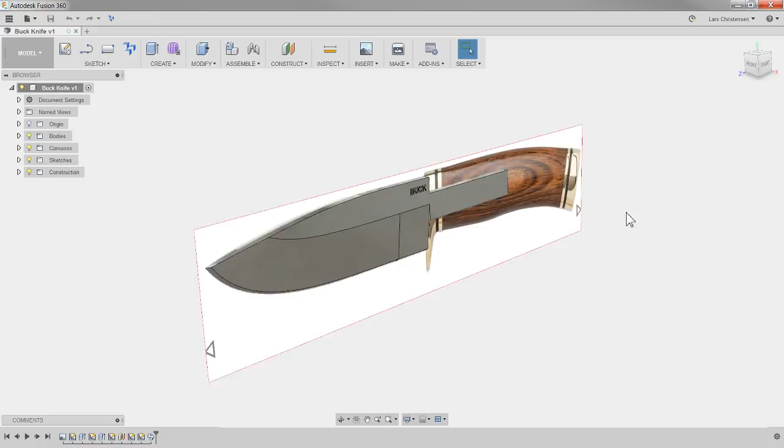My reason for doing that is nothing more than if you want to create this, you have to manufacture it. I talked about my friend John Grimsmo, by the way his website is down in the description after this video. If he was going to make this knife, he would probably break it down into individual components, because at some point he's got to assemble it and be all good with it. From my perspective, I'm really just modeling up this knife, and I don't really care about these different things being different components.

So I decided not to do it yesterday up front, because rule number 1, which is talked about on the forum, means that before we even started doing anything on the screen, we would have right-clicked up here and created a new component. That new component would be the blade, and then we could create another new component. We could rename it by slow left-click, and call this one the handle. Then instead of right-clicking up here to create another component, we could right-click on the handle and say new component.

You'll see that breaks down to a subcomponent, and in here, because this handle is kind of different—there's some different parts within the handle—we could say there was the brass front, if that is what this part is, and then create another component in here and call that brass, too. I hope you get what I'm trying to say here. Rule number 1 on the forum says you should do all this before you even start modeling things up, breaking it down.

That way everything gets organized, and I'm not saying that's wrong. However, on purpose yesterday—let me delete all this—on purpose yesterday I decided not to create any components. There is only that main file up here and one body to create the blade. The reason I did that was I wanted to show you what actually happens when you don't follow what they call rule number 1. It's okay, I don't want to get into a big argument about rule number 1, but in my opinion it's perfectly fine.

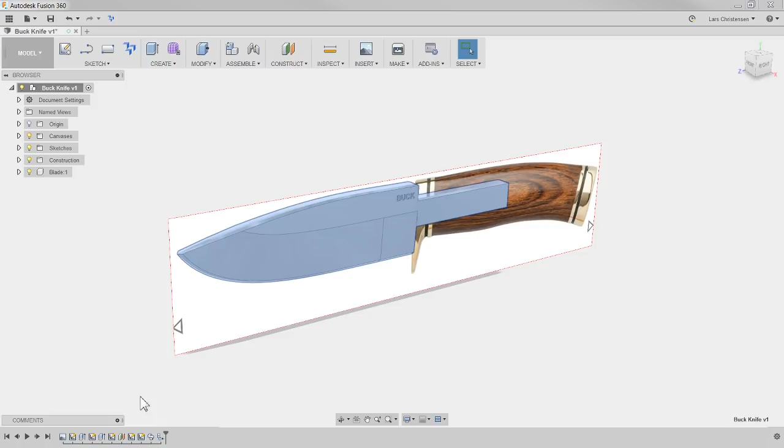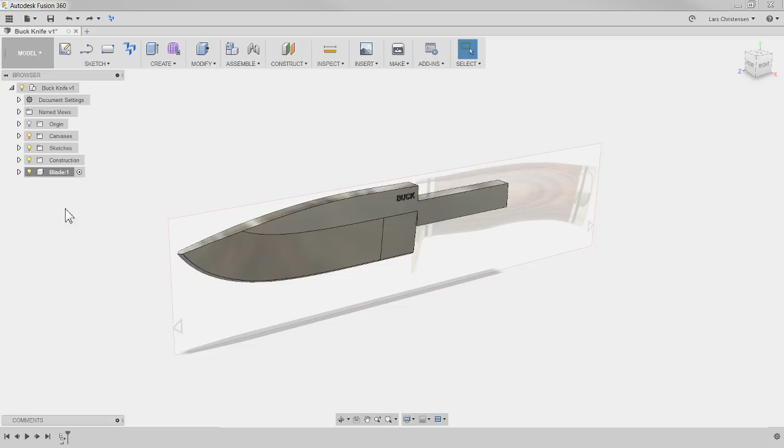Some people would argue that because I turned that body into a component, everything in here should have ended up in that component when I switched over. You can argue about that all you want, and I'm not going to tell you what's right or wrong. Going back to the point where I don't have any components, just a body - the reason it doesn't get packed up and sent in with that component is because Fusion literally follows the history structure, and all this was created in order. That's why it's not breaking in, and I think it's perfectly fine.

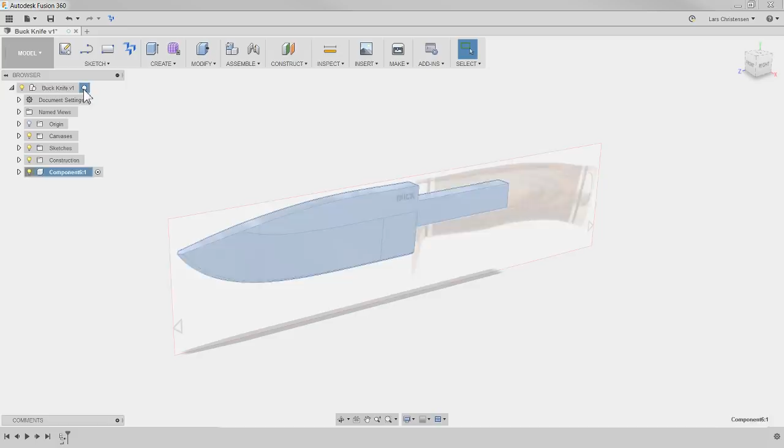I don't think it's a big issue. You can absolutely, if you decide suddenly this is going to become its own component, go ahead. There's probably some scenarios where it's bad, but I don't think it's terrible to right click and say I'm going to create a component from this. I just know that component doesn't have the history in it, but it's out here because it actually follows the timeline. I hope I didn't confuse the heck out of you. That's really why I wanted to show that yesterday.

I'm just going to do this whole thing as one big body. I'm not going to break it down into components. If you want to do that, go ahead - that's fine.

Somebody asked what these arrows are here on the canvas - that was literally from the screenshot I stole online of this Buck knife.

Okay, enough - let's get in and do this handle. We're going to do it both as a modeling exercise and as a sculpting exercise, since we can do that in 30 minutes or so. I think it's important you see how you have different options for how to do something like a handle.

Let's start with the modeling environment, since that's kind of what we did yesterday with the blade. I'm going to leave the blade turned on here, and leave the canvas on here too, so let's model up the handle.

Now I'm going to start a new sketch, and I'll show you some cool things here too. I'll start on the side of here. What I'm actually going to do - we talked a little bit yesterday about using guide curves - we're going to do it the model way first. I'm going to use these top curves here as guide curves.

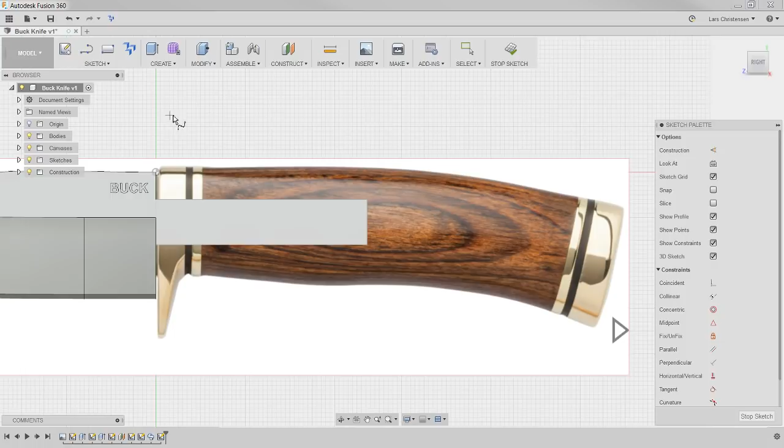So I'm going to go back to my spline tool and zoom in a little - well, I'll wait on zooming in, that's okay. By the way, make sure you're aware there's a snap to grid option down here if you feel like this is snapping in.

I'm just going to select a point right around where I want the handle to start. I'll click another point where there's this transition between the wood and - is that brass? Yeah, it's got to be brass, right? I'll place another point down around here, another transition from wood to brass, and then about the end here, and hit the green check mark. This isn't really pretty right now, but we're going to work with that quickly.

So I'm going to zoom in here. Now remember yesterday we placed the origin right here on the corner, so I'm going to make sure these two are kind of in line. I'll go in and do a vertical relationship between the origin and that spline point.

So I kind of make sure they are right there. Another thing I'm going to do if I click on the point here is I actually like to start out by always making spline points horizontal or vertical. It just kind of tightens things up a little bit. That's a good practice, I think. You can always delete them again if you want to.

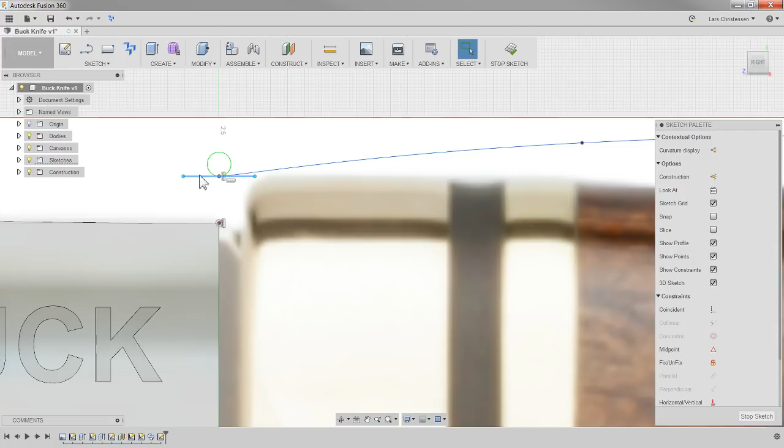I'm going to drag this point down about where I think it's going to start around here. I'm actually going to go over and drag this one down too, get a little bit closer. So I place these spline points, and now I'm going to go in and adjust them to about where I want them. Okay, zoom out a little. So let's take a look.

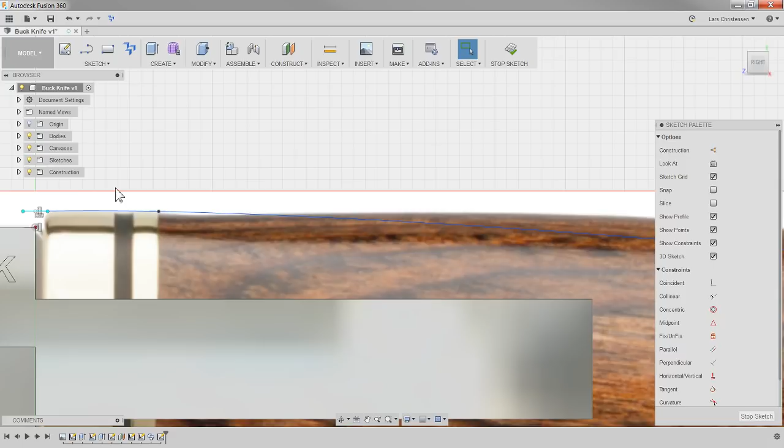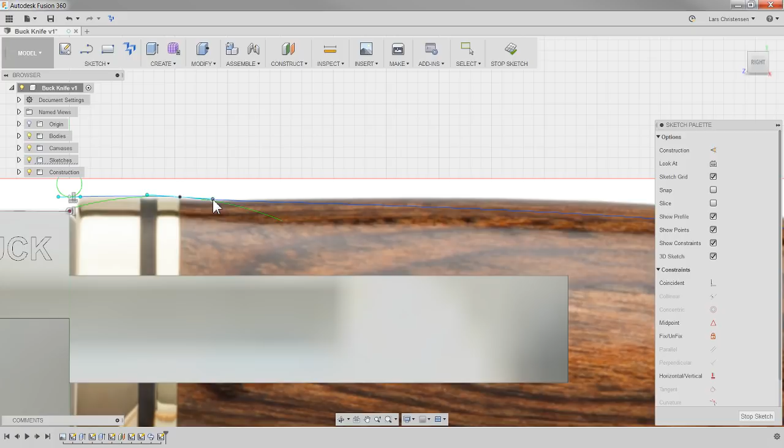So this one here, this blue line is definitely not great. So let's go ahead here and start dragging on the spline points a little bit and see if we can get that blue curve. And I'm not going to try to be perfect. The longer you're sitting around playing with it, the better it's going to get. So be aware of that. But I'm not going to waste too much time trying to make it perfect.

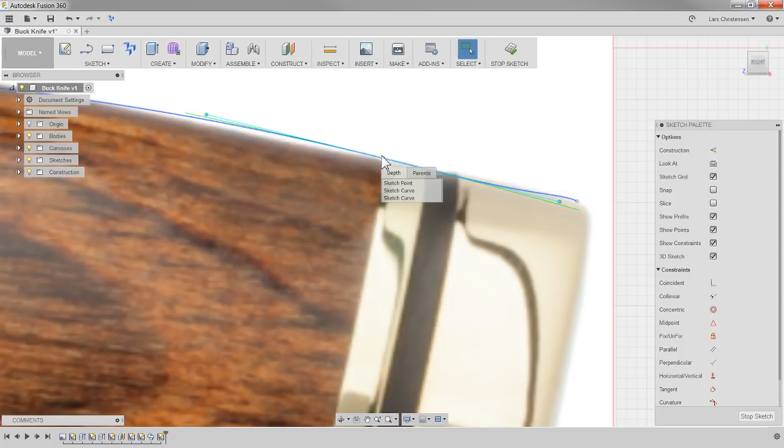So I'm just going to drag this one up there. Perfectly fine. Let's go back over. See how this one kind of curled up? Don't panic. It's probably just an end point that needs to be shortened up. Like that over there. I'm actually going to move it up a little bit. The problem with these splines is that when you are moving around different handles, you're getting a little bit different results. But this actually probably is pretty good.

Right there. See, I moved one point and now the line here changed. So you might have to play around with these a little bit to get them somewhat good. You can insert more spline points for more accuracy, whatever you want. Okay, I'm done with this one up here. Then I'm also going to do another one because I'm going to have two guide curves, so two rails down here. So I'm going to go up and do another spline, and do the same thing. I'm going to go a little faster this time.

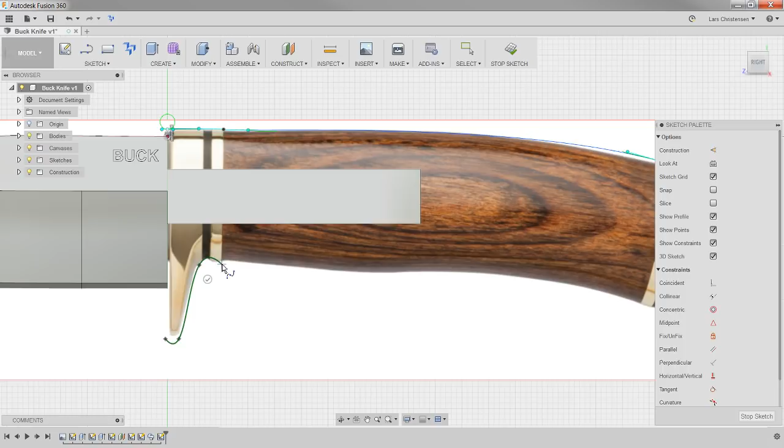So I'm just going to place a couple of points, maybe one there, same intersection as the other one, same intersection over around here, and then the end there. Hit the green check mark. Okay. And I'm going to do the same thing to this one down here. I'm going to create a vertical relationship between the 0 and this endpoint. So I know that those are good.

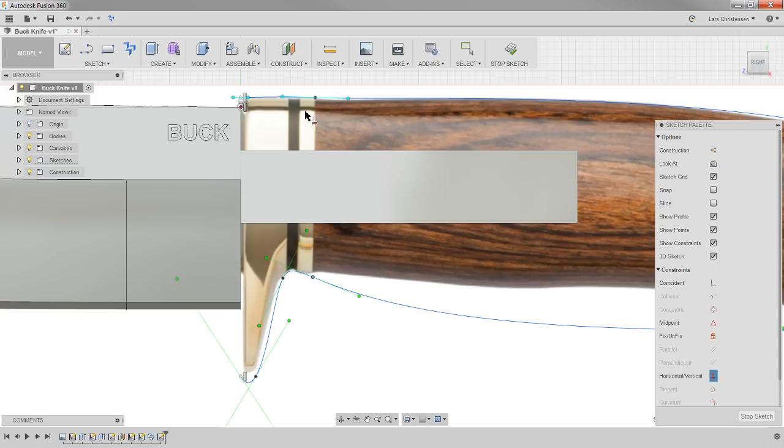I'm also going to do the same thing over here, between this one and this one, because those two are probably pretty much in line. This one and this one. Okay. We could go ahead here too, and just like before, grab this handle here. We could make that parallel to these two lines. That's perfect. Let's get it a little bit closer. Let's get this one dragged in a little bit.

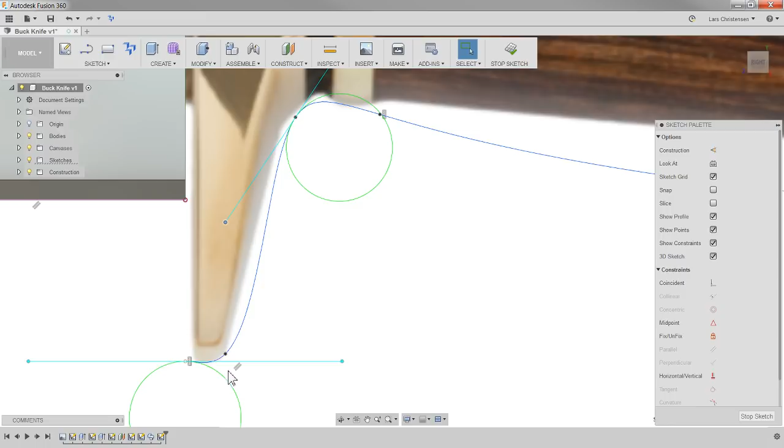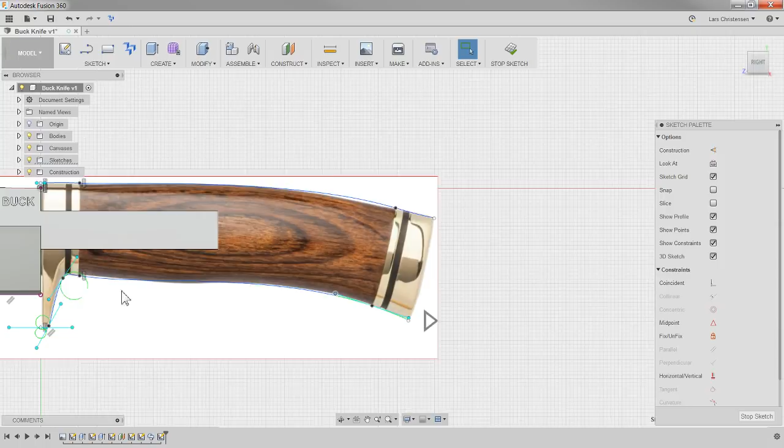Again, as you're working with splines, you will very quickly feel a lot more comfortable with them. So if you're looking at me right now and thinking, wow, I can tell you that you spend a little time doing this and you're going to feel very comfortable doing this. This is actually not that difficult. Like I said before, most of the time people are struggling with spline points because they're inserting too many of them. I should maybe have inserted one right here on the center point too, but I'm going to stop trying to be too perfect.

Now I did also curl this one up, so watch out for that. Move it around, get a little bit closer. Okay, I'm going to stop here. Another tip I want to give you: we know that these spline points are in line. We know these are in line. Sometimes it can actually help inserting a dimension. So D for dimension, and I'm going to show you why I'm doing this in just a second.

So I'm going to make this one 10.5. So I'm actually putting some constraints on these spline points. We talked about adding constraints yesterday. But these here I'm going to use for some construction planes. So I'm just rounding them up, just to make my life a little easier.

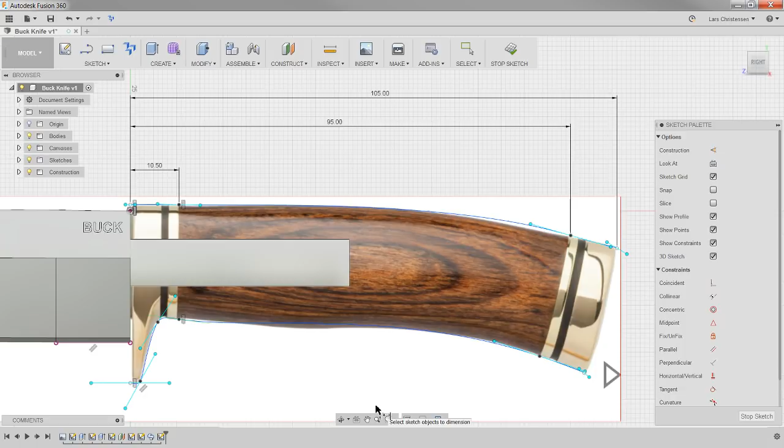You know me. Okay, so this is really what I'm going to do with my two guide rails. Now what we're going to use for this is the loft command. So I'm going to stop this sketch right here.

And by the way, here's a tip. If we go down to that sketch, if you didn't know this, over here to the left, if I right click, show dimension. Look at this. Now we can actually see them, and it's going to be useful. Okay.

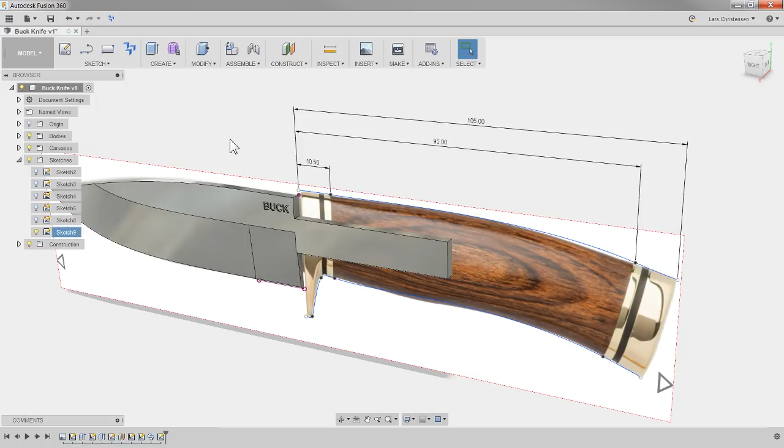So for this, we're going to need our profiles. So I am going to turn the origin on so we can see it, and I'm going to use the ellipse for this. Now, I didn't take a side image of this knife, so we're going to have to play that by ear right here. Also, be aware, many times it's easier to start your sketches out to the side and then drag them in. So I'm just going to make this ellipse right here.

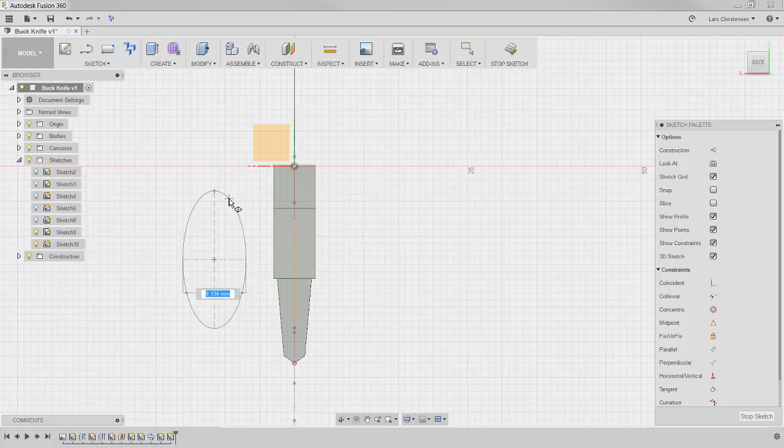You get to put in a dimension for the width. Put in 20. Like that. So now we get a 20 here. Now let me just move my part around here so you can see that that sketch is sitting on the side. It's not sitting in the right place, but it's sitting right there where I want to start my handle.

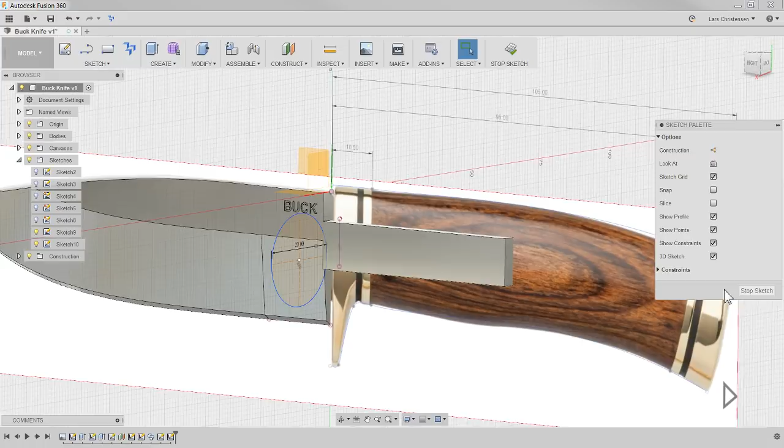Now I can go in and use constraints, and I can say this point on the ellipse, I want that tied right into my spline point right up here. And I want the other end of my ellipse to be to this spline point down here. Now you can't really see it because the canvas is kind of in the way. See that? So now that's going to be the beginning of this loft profile. So I'm going to hit stop for that.

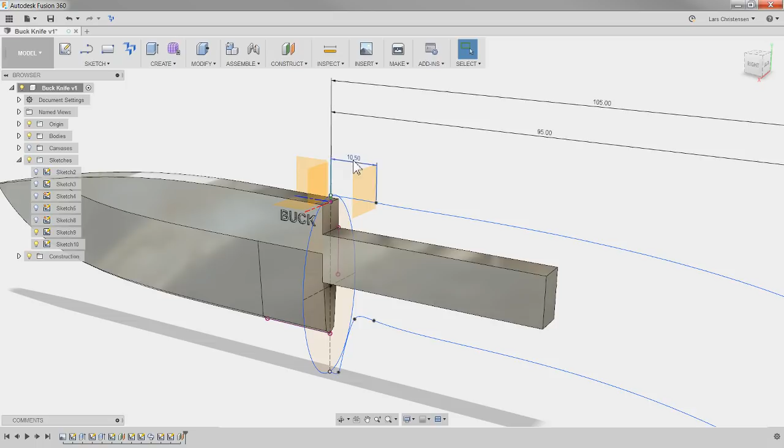And then I'm going to create another one right here in the intersection. So that's going to be where I wanted this dimension. So what I'm going to do is create a construction plane. We used that offset plane before from this face, and I'm going to go out that minus 10.5 where I know my intersection is. So these are almost like reference dimensions for me now. I'm going to start a sketch on that. Right click, create a sketch.

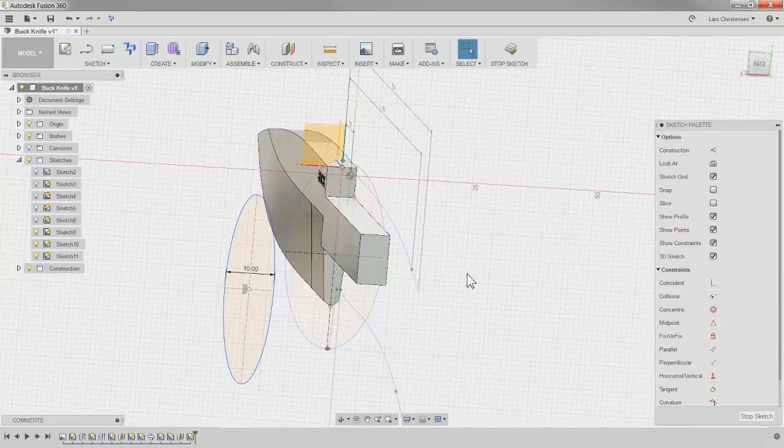I'm going to create another ellipse here. I'm just going to sketch that one out here. Line goes up, a width. I'm going to make this one 10. Okay. Let me spin my model around again so you can see that ellipse is sitting out in space. I'm going to do exactly what I did before.

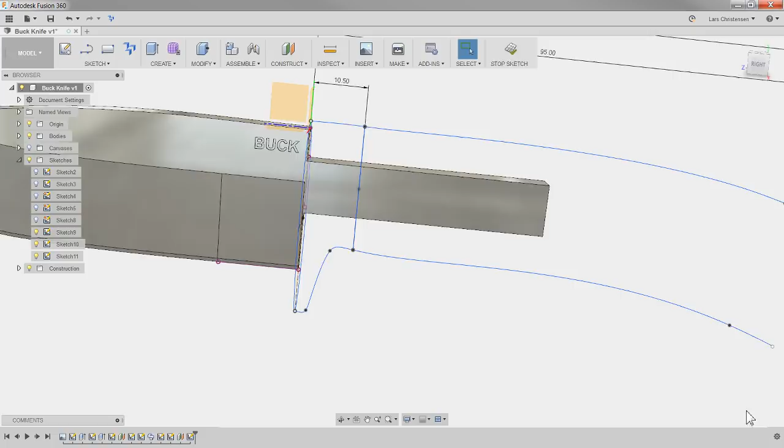Coincident relationship between that top point of that ellipse to where our spline was on top, and one from down here up to where it was up here. Okay? So what we just did was create these two profiles through here. And if this went too fast, just rewind the video, right?

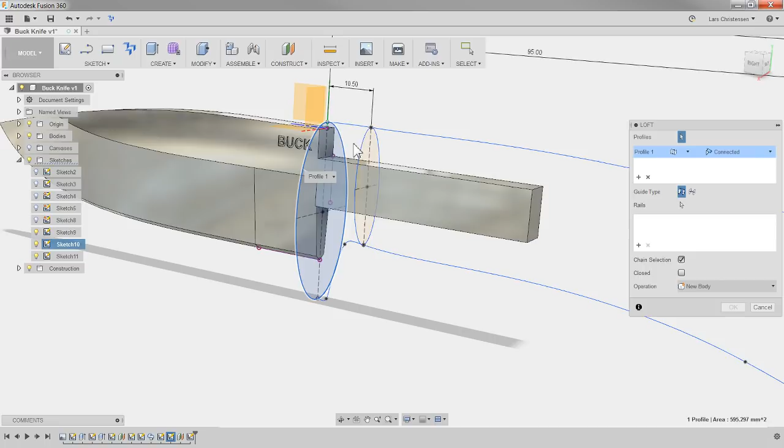So here comes the cool thing. We're going to go in and use a loft. And the loft looks for two profiles. The first profile is going to be the first one we created. The second profile is going to be this one. And actually, when we did this yesterday, I left this metal piece here, like a part of the stock of this blade. So it sees that, so it actually wants to make it a cut. If you ever see red, it means cut.

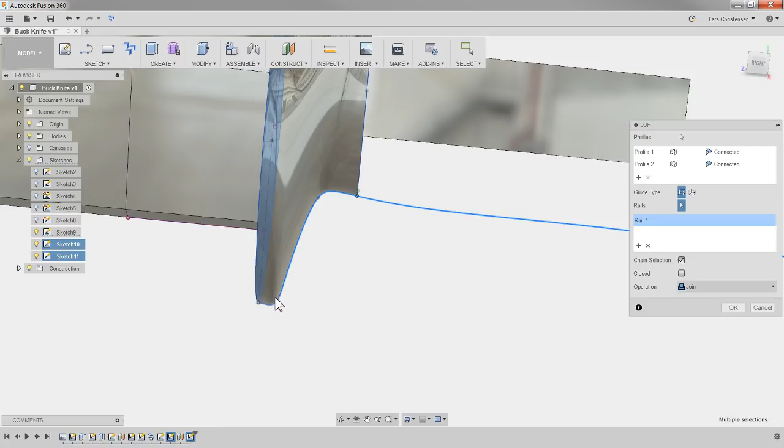Because I'm going to make this into one big body, I'm just going to select the join. And when I do that, you will see that we get a nice transition between those two profiles. Look good? Hope it looks good. Now, we wanted to create those two side splines for our rails. So I'm going to go down over here to the right, click Rails, and click right on this bottom one here. And look how nice that rail makes the top follow right there. It follows that really nicely.

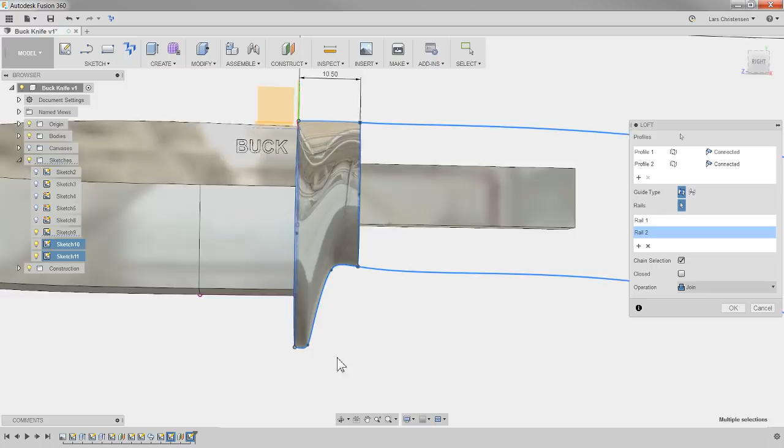Now, don't throw up when you see the top. You see how we're really pushing that whole shape to follow along there. Well, we can, of course, select multiple rails. So I'm just going to select the top, and then everything relaxes, and we get that in there. Let me just hit OK. And we can see that segment right there. Okay.

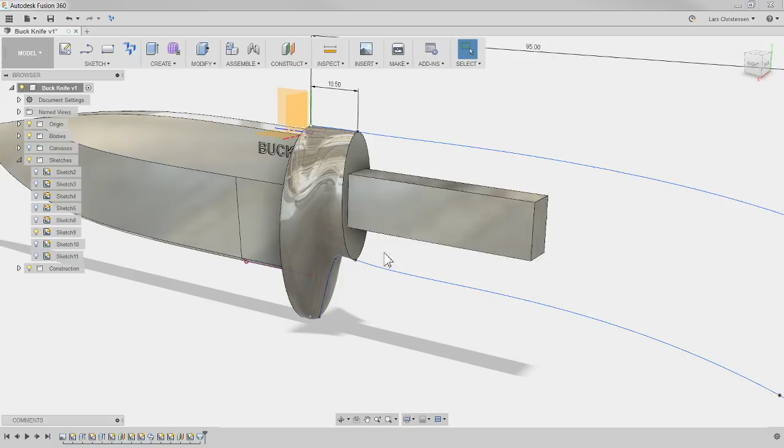Now our sketches, when we did this loft, our sketch gets consumed. You can always turn it back on over here on the light bulb. We can kind of see that showing up again. So that is really the trick, to go all the way through with this part here.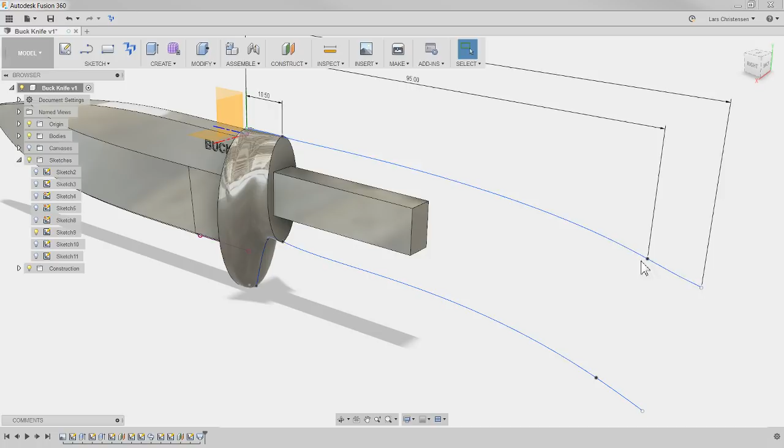So now I can actually go ahead and create another part. Now, one of the things you will find handy is to actually steal edges from one end to another. You don't always need them. But if we go in here, you can open up a sketch on that face we just ended at. And if you hit P for project, we can steal that edge around there, so we don't have to draw that same thing for the next loft. Because I recommended breaking it down into different lofts.

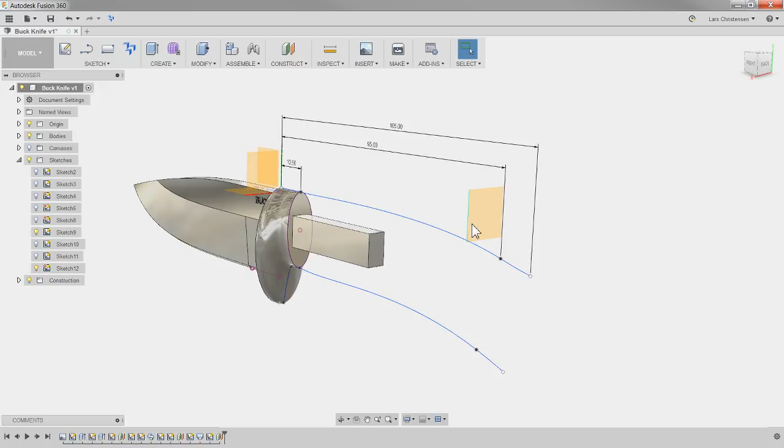Now, I'm going to show you the next segment here, because this is going to be interesting for you. The next one, we're going to do an offset from the origin. This time it's going to be minus 95, right there. So now I can start a sketch on this one, right click, create a new sketch, and we're going to do the ellipse again, and do what I just did before. I'm going to sketch another one, exact same width, 10.

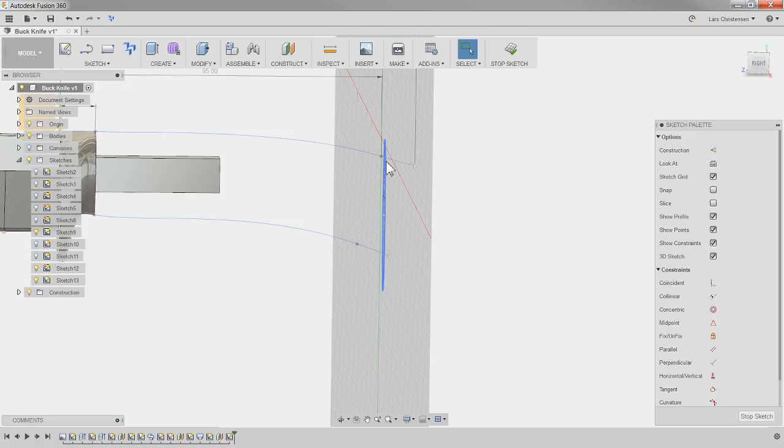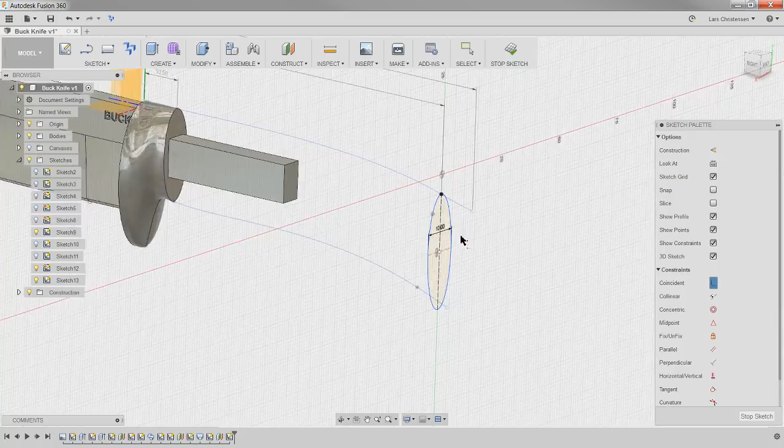But now you will notice if I go into the side view that the two endpoints that I want to snap into are not in line. You see that they're at an angle. You have this 3D sketch option over here on the sketch palette. Make sure that is turned on, because that will let the sketch go into 3D sketch mode. So if I do a coincident from here to here, that was on the plane, so that is not very exciting. But when I click from here to here, it will actually let that sketch go in an angle. Okay, I hope that was useful.

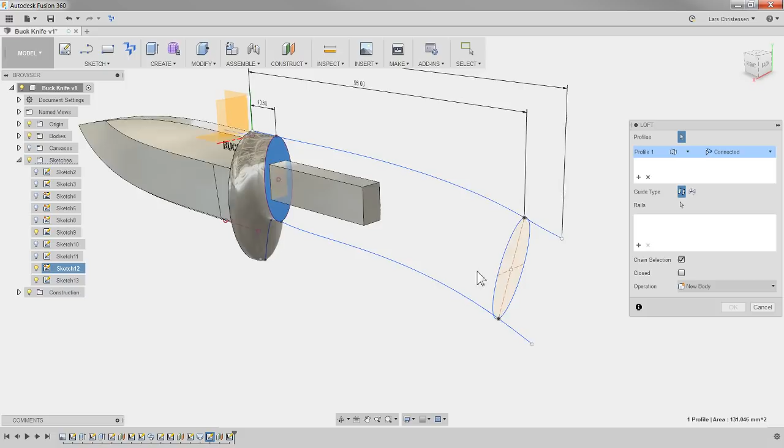So now, stop that. Go back again. Hit another loft. We can select that edge we had right there. We can select our new sketch. Again, it goes back into a cut because I still had a bit of material left in there from the blade from yesterday. I'll change that to join. Now we get a handle, but of course it's a straight transition between the two. So we're going to use the guide rails again to give it that ergonomic look there. See how the handle starts coming to shape?

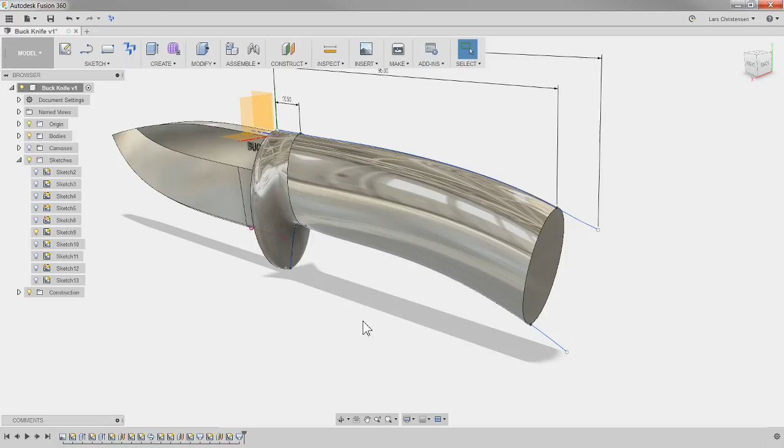I'm going to create the last one, and then I'm going to show you the sculpt. I might run a few minutes over today, but I think it's important that you see both of these. Now, because this is a smooth surface, I actually don't think I have to do that projected edge here. I'm going to test that out. So I'm going to create the last plane, offset plane from this face. That's going to be minus 105. So that plane goes right there.

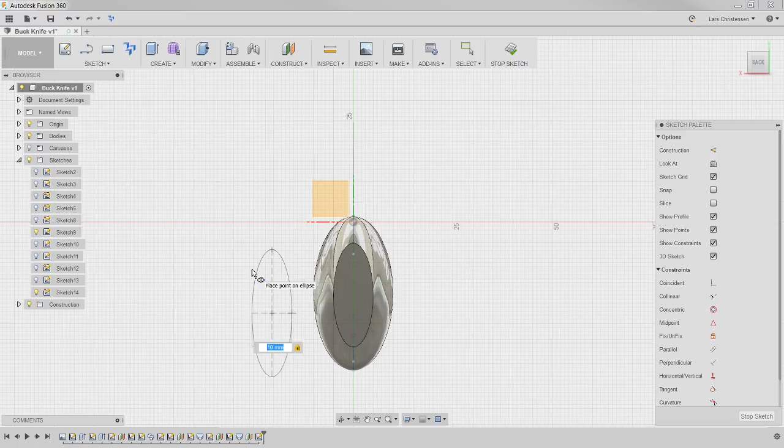Let's create the last ellipse from this face and create that up there. I'm going to make it 10. And then we're going to do like I did before. I'm going to do a coincident from this point to this point. And again, make sure you have that 3D sketch turned on so we can snap into there and get that angle on it.

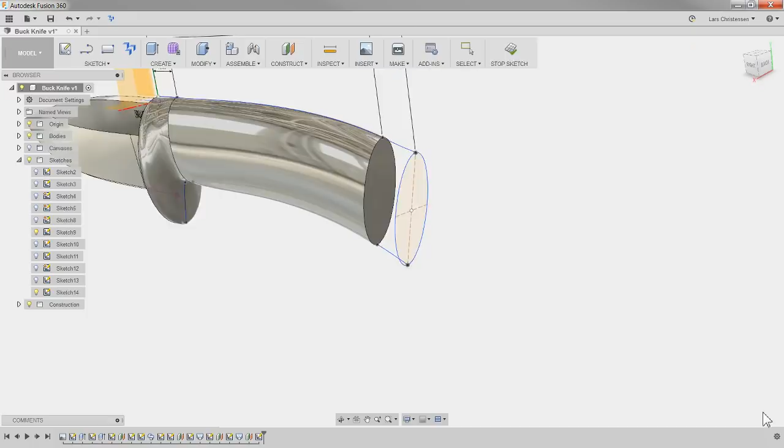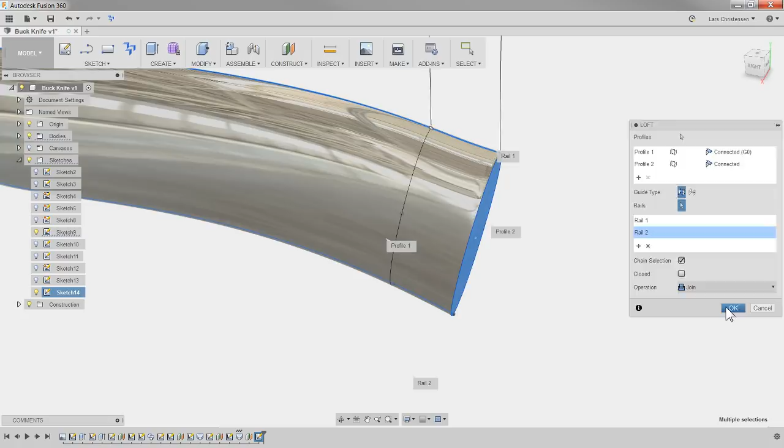And let's see if we can do a loft without projecting, because we don't have anything interfering on this one. So loft between here to here. See, we get a perfect one there. Again, I don't know if the rails really do much on this one, but just to pull it close, just like that, and click enter. Now I can hide the dimensions again. That was on sketch number 9. We can just hide sketch number 9.

To wrap this one up, I would probably add some fillets. So we can add a fillet to this edge here, and I don't know what we can go. 3. That actually might be a very nice fillet on here. We could probably also add a fillet over here on the top. We would add some chamfers to the knife and things like that.

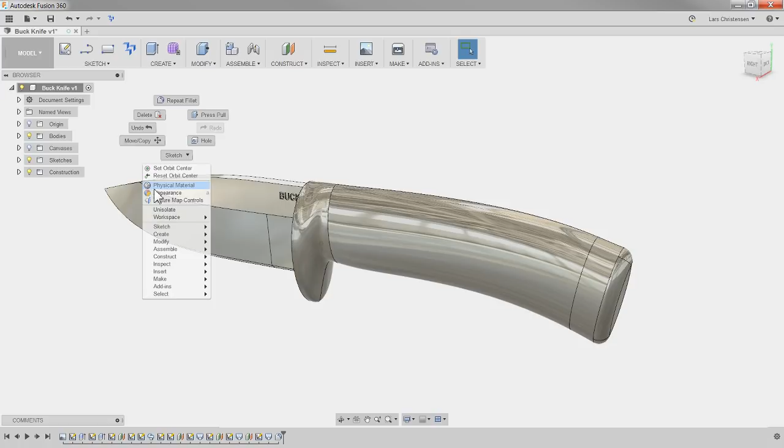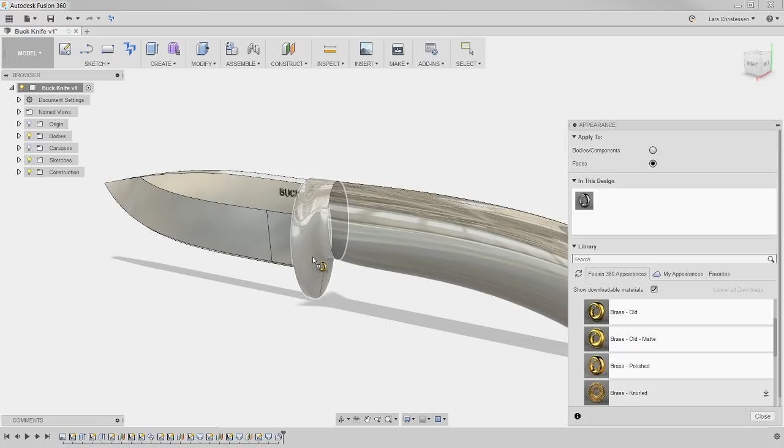The last thing I wanted to do to this one before we get into sculpting is, we can right click, do appearances, and let's go into metal. Let's go into brass, and I don't know which one we want, old or just brass polished maybe. And I'm going to change this to faces because we only have one body on this one. I'm kind of being a rebel doing this. And drag that over to that face, probably also onto that face there. We can do the same thing. Which one was it? This one. So there, to these last faces.

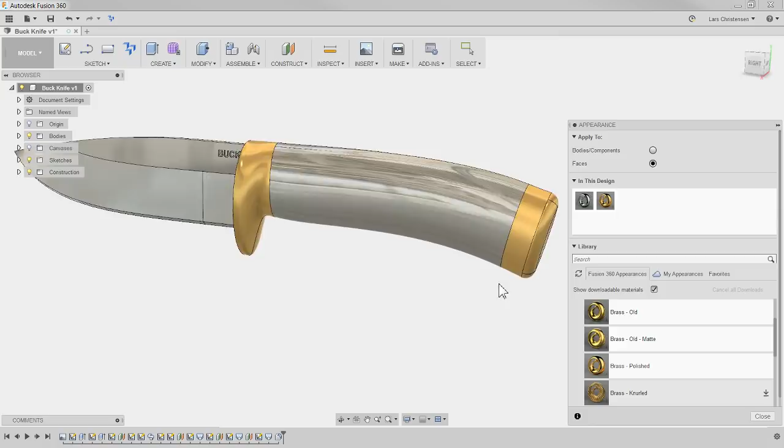This is just to make it look a little bit better, and then let's throw some wood on it. And I don't know what you make a handle out of, mahogany? That'd be kind of cool, wouldn't it? I don't know. So there is the modeled way to do this, right?

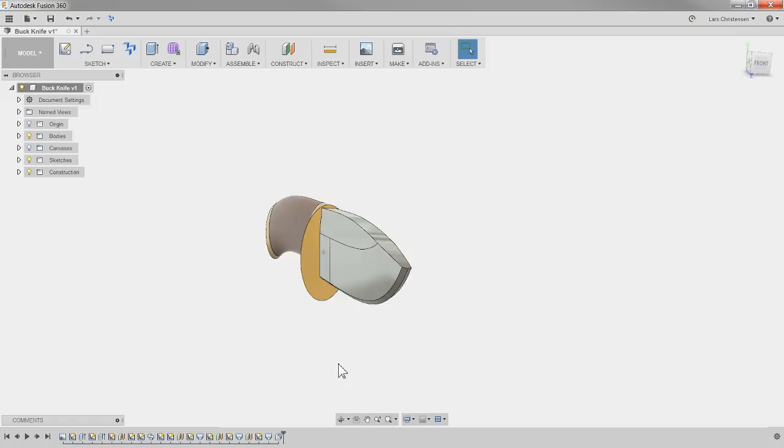So I hope that this was useful for some of you guys to see how to model up this knife here. Now I am going to spend 5 minutes, 10 minutes extra and jump in and show you how to do it with the sculpting. So if you were watching this just to learn the sculpting, I am sorry, but you gain hopefully some knowledge.

Hopefully. So what I'm going to do is move all the way back to where we were. So I can drag all the way back to there. Now we're back to where we were before we started the model, right? I am going to start another sketch, because this sculpting is going to go a little faster, I think. But instead of doing the guide curves, I'm actually just going to draw a line somewhere around here.

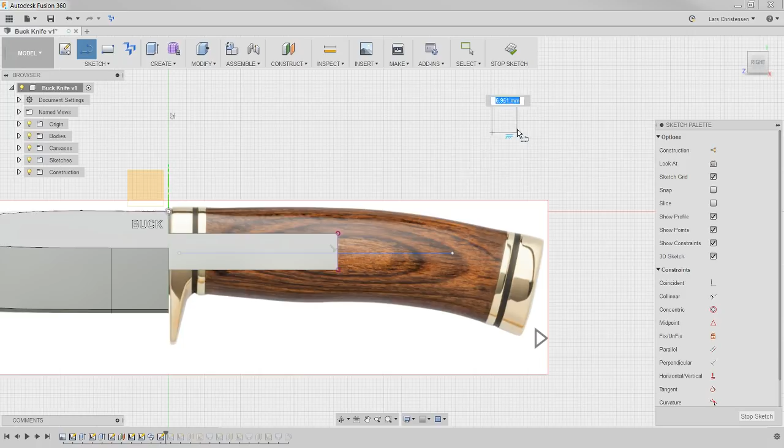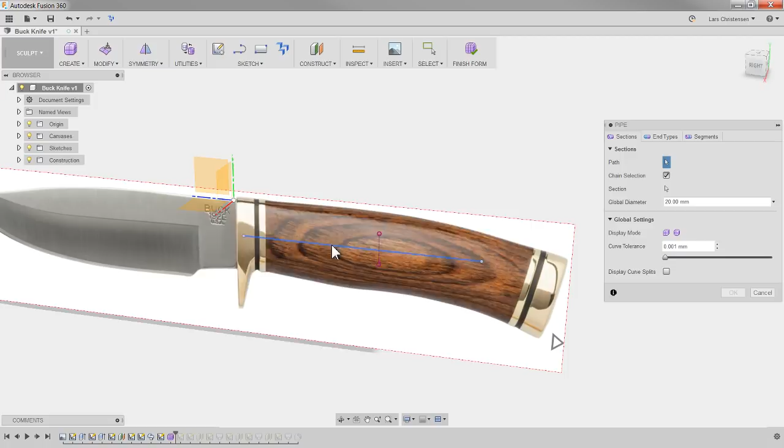Doesn't really matter. And then I'm going to go into the Sculpt workspace. It says, yep, I'm good with that. And what we can do in here is we have these different preset ones. We've talked about this before. So I'm going to select pipe. And if I select this line we just created, you will see that we get a segment here. Now we can make it round. That's what I want. And we now get this round type of tubing.

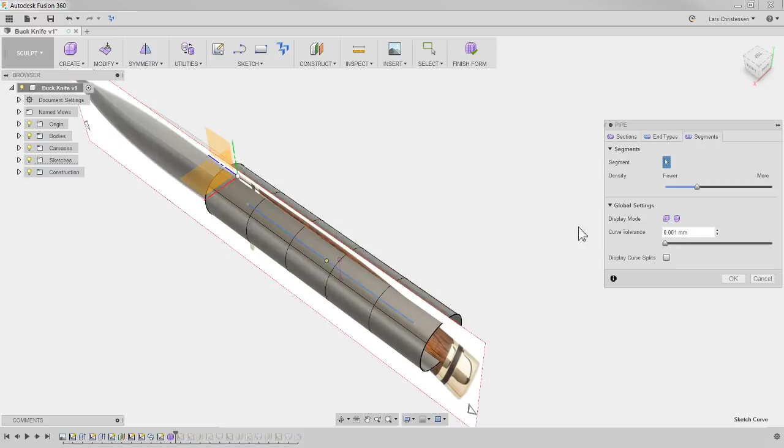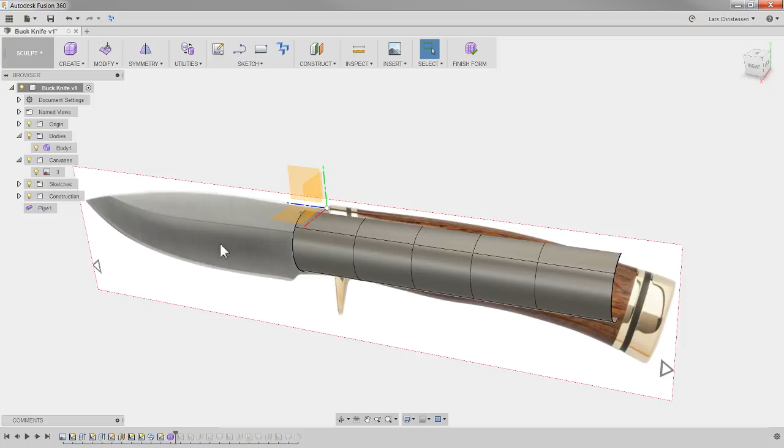You can choose to create different segments, whatever you want here. I'm just going to hit OK. So now I have this tube. Now I might just hide the... well, let's just leave it like that. That's fine. Or we could turn the canvas down maybe. That's fine. We'll just leave it. I thought for a second that was a solid blade I'm seeing, but it's actually the image. We want the image.

One thing I want to show you that you can do also in here is be aware that you can subdivide it. So when I click subdivide in here, you can actually specify what we want. So I'm going to change this to 1. And I think if I select here along this edge, I can subdivide this one down the center. This can be very handy.

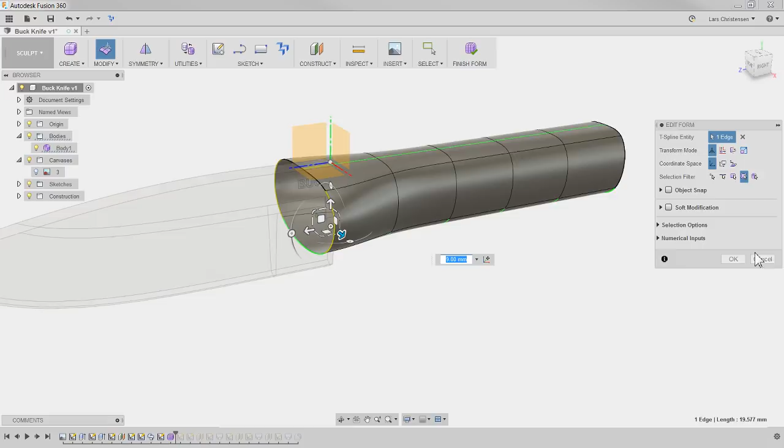If I subdivide this, now I can actually go in and add symmetry. I've talked about that before, where I create a symmetry between these two, which gives me a green line going down, which means that now if I select this edge, right click, edit form, and drag this out, I'm actually dragging symmetry on the other side. That is a very nice function. Now, I'll just undo that.

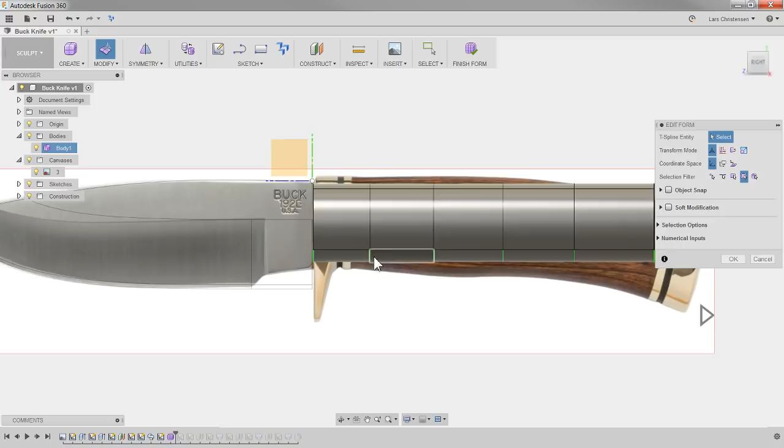With this, we can start doing the same thing we did before. So let's go in here and I'm going to double click on the edge, which will select the entire ring, right click, hit edit form, and now we can start dragging this back to about the same place I wanted this to start, right? We could click on space, click this top edge here and maybe start dragging this up a little bit there.

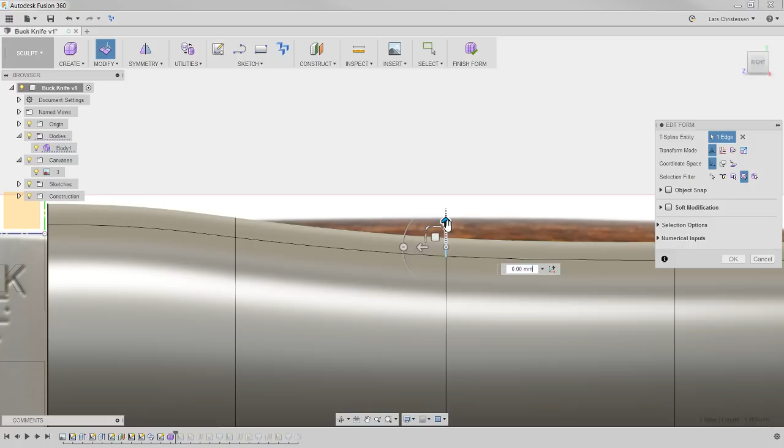So now we can zoom in a little. We can start forming this to that shape we want for the handle. So right now I'm just selecting the upper end of this here. Now this here, of course, double click to select the whole edge around. We can start moving this segment down here.

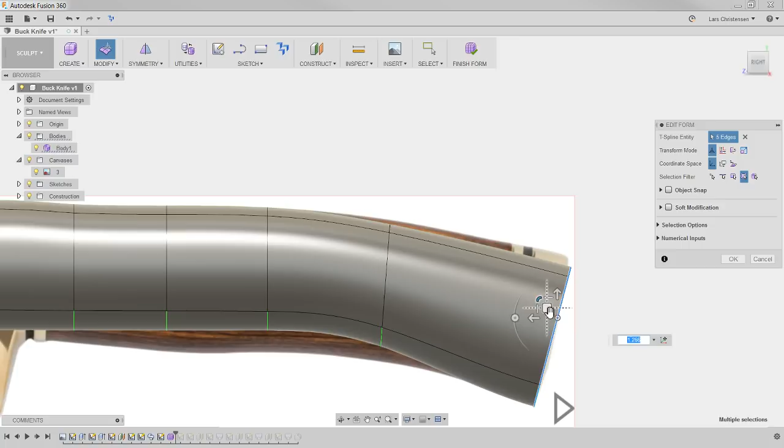We have covered sculpting before. So now we're back to where we can start playing with matching this the best we can, right? Whoops. And again, just like with the splines before, just get yourself in here and play around with this a little bit. That will definitely help you get this set up the way you want it. Oops, I just want one edge.

Okay. And you can also insert more edges if you want to. That can be kind of handy. Like I'm looking at this edge here. We actually probably want that to, right? It's gotta go all the way down there, which means that this edge here has gotta be manipulated a little bit.

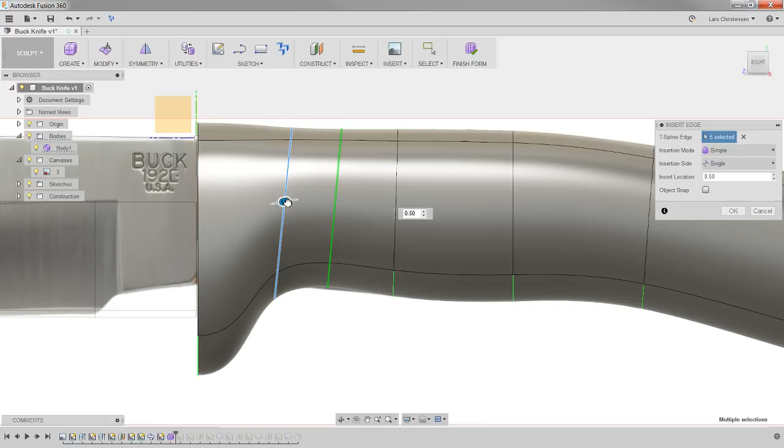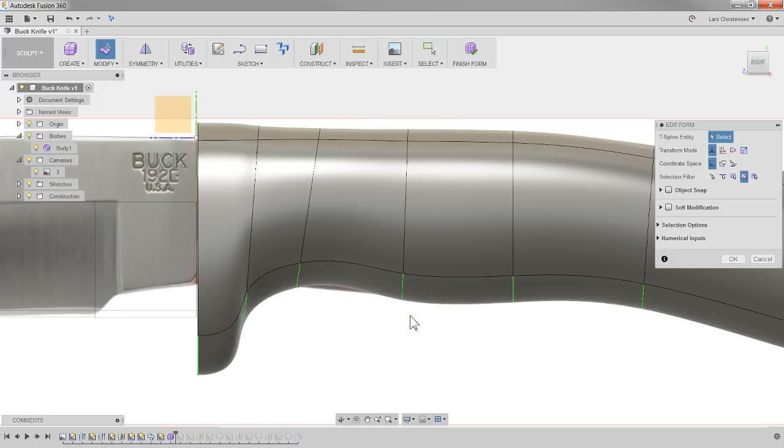What you can actually do, if I get out of this, hit OK, we can actually go over here and we can insert an edge. So we actually get an option here to kind of insert another break. That might mess up a little bit with my section here, but I think you can see what I'm getting at. So we're inserting more segments in here that will give us more tools to manipulate and work with in here. Okay.

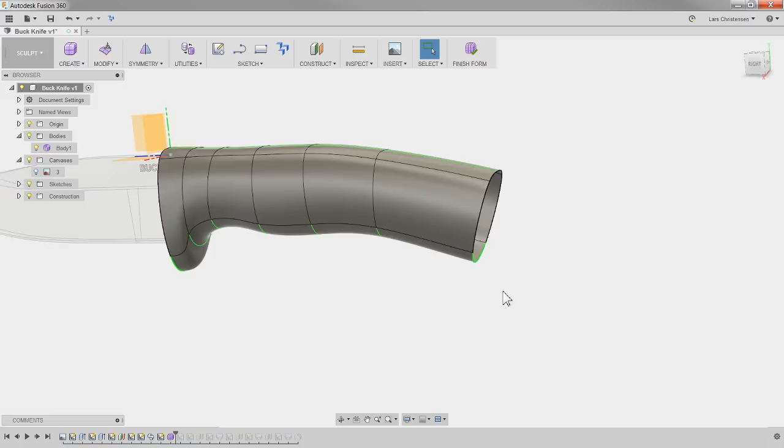So now at this point, we kind of got something somewhat similar. Didn't spend as much time on it, but let me just hide the picture. Right? Not too shabby. Be aware that in here there's a lot of different options. One of the things we can do here, if I double click on this back edge to select, double clicking an edge selects the whole loop.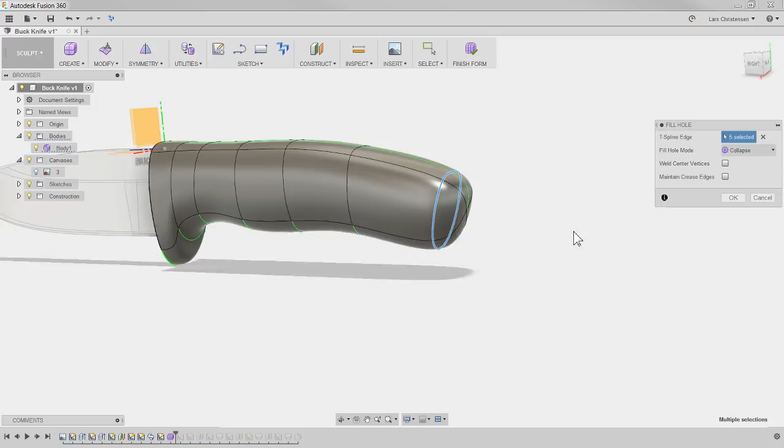There is one in here called fill hole. Now you get some different options in here for how it's gonna close that up. Maybe that is a little bit better. Again, you can play around with how you want the ends to go. You can actually make them entirely flat if you want to, or you can play with the conversion of that here. I'm just going to hit OK to that. And I could also do the same thing on the other side.

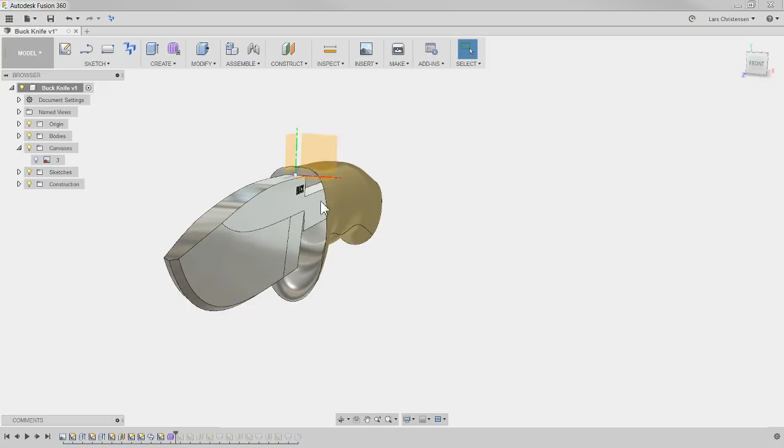But what I want to show you is, let's try here now. When we're done doing this in the sculpting environment, let's finish form by clicking up here. And when I do that, it's important that you know that this is just a shell right now because I didn't close this end up, which means that when I go over to my bodies over here, this is a surface body for the patch workspace.

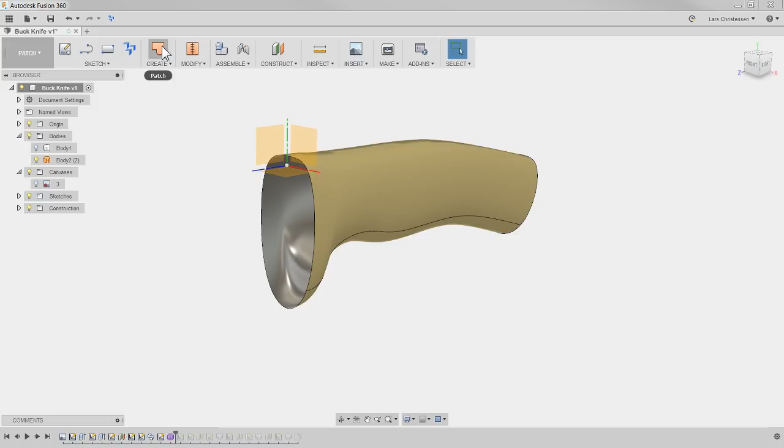And now this might get a little complicated. Now I'm jumping around a little bit. But what I could do, let me hide the body. What I could do here for our handle is go over to the patch workspace. I wanted to show you this. And I could create a patch here also. So I'm kind of doing the same thing I did inside of the Sculpt environment, and hit OK.

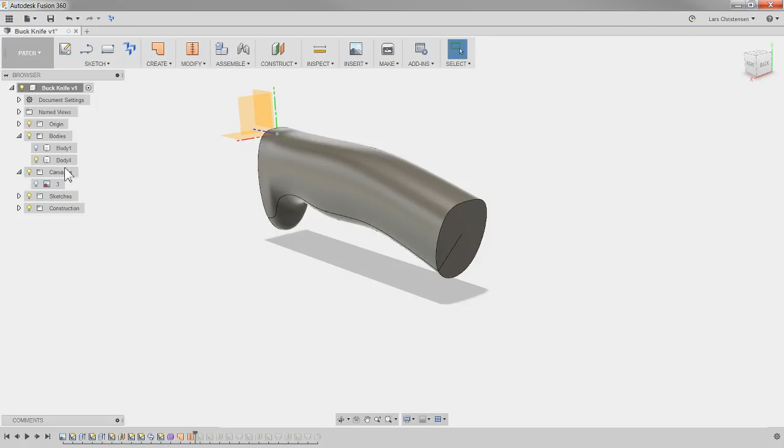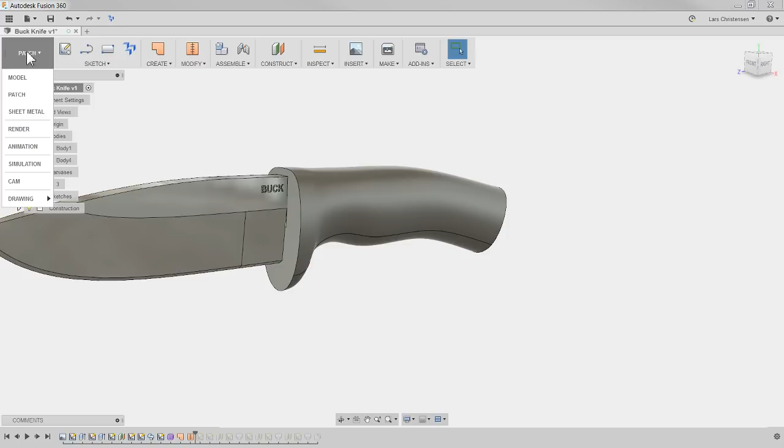So now what we can do, I hope you guys are patient with me, we can go in and use combine. We've used that one before. Click on that, and we can combine these two, and now they are going to become one single body. And we're back to where we were before with the handle. Now again, we could go in here and try to add some fillets. I'm not sure what the fillet command is going to do to this. It looks pretty good. So we can add fillets to this just like if it was a solid.

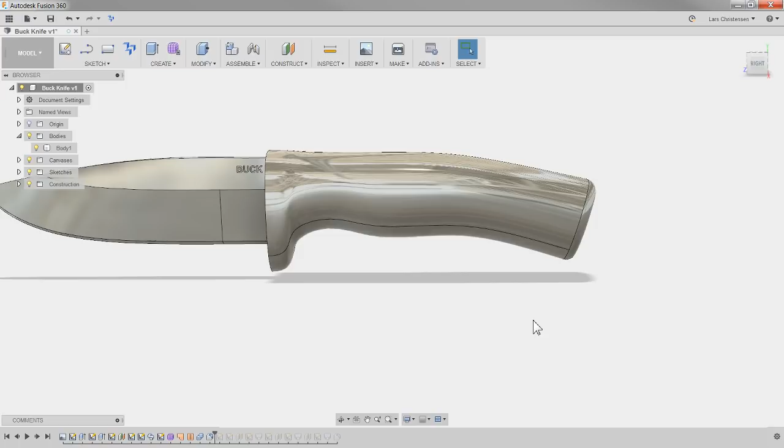I wanted to show you one other trick, and again, if this is going way too fast, I'm sorry, just roll back, repeat, watch it again, right? You can slow down the videos. I want to show you one other trick that I've wanted to show you forever. So this is really just one big body right now.

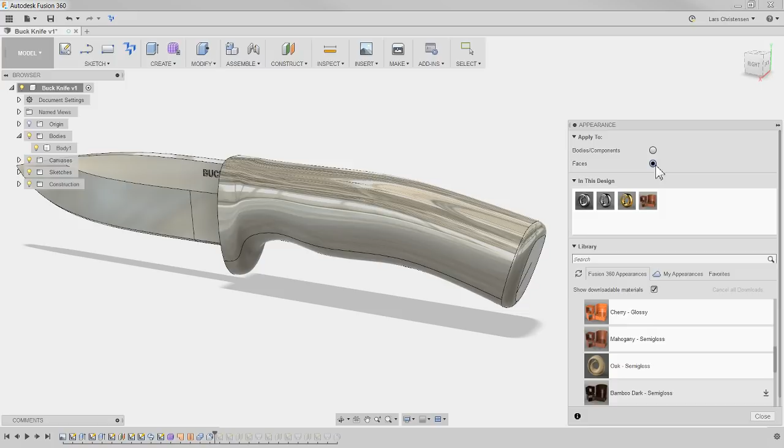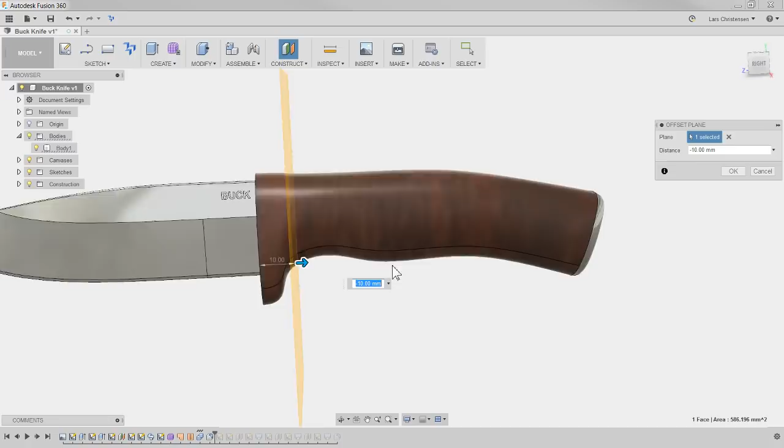Now, of course, when I go in to do the appearances of this, I would love to show you the same image I did before, where I had the brass and the mahogany handle. But what happens when I drag this in is that it's going to be on all the faces in here. Well, there is a tool. We actually have a plane down here, but if we go back and create another offset plane like we did before, what did we say it was? Minus 10, I think, to place it in the same place. This is one thing I want to show you. This is great with appearances.

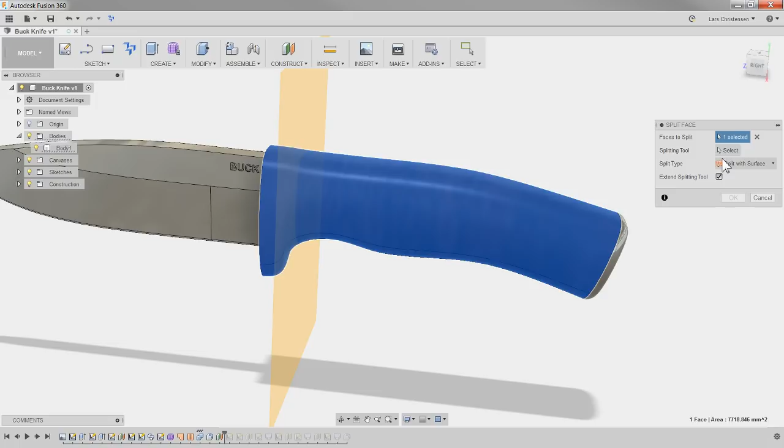I've talked about before, we can split bodies, but we can actually also split a face. All we're doing is when we're selecting this handle, we are splitting with that plane. It's not changing anything other than just the appearance of the face here.

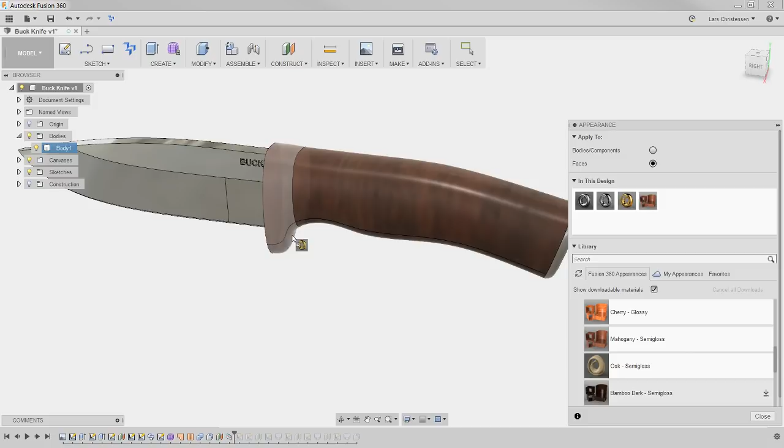It's not really messing with anything other than just that blanket that is wrapped around. What that means is now if I go back into appearances, I can apply that brass just to have it on faces, right to there. Oh, we just found an issue. You can see how it's highlighting it. Oh, there we go. What the heck did I do?

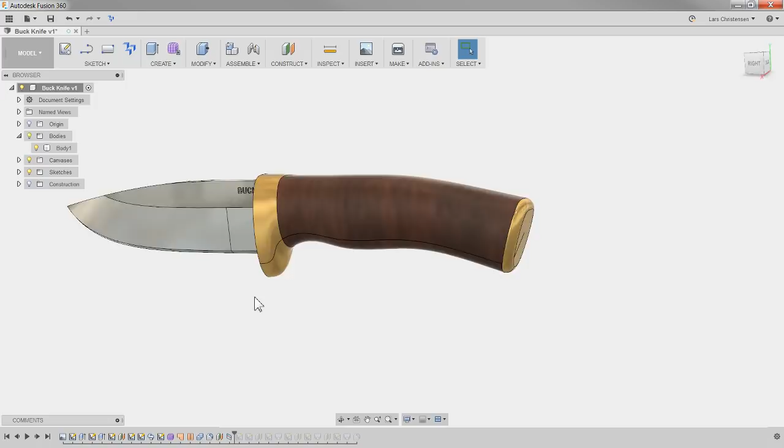I'm sure that was user error. Now we can do the same thing, of course, down at the bottom here. We could create another plane at an angle, and we could put that on there. So two different ways to get to the same place, your preference on where you want to go.